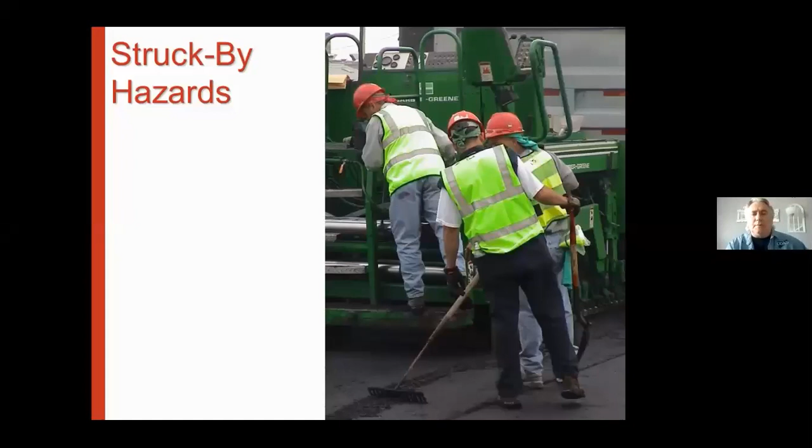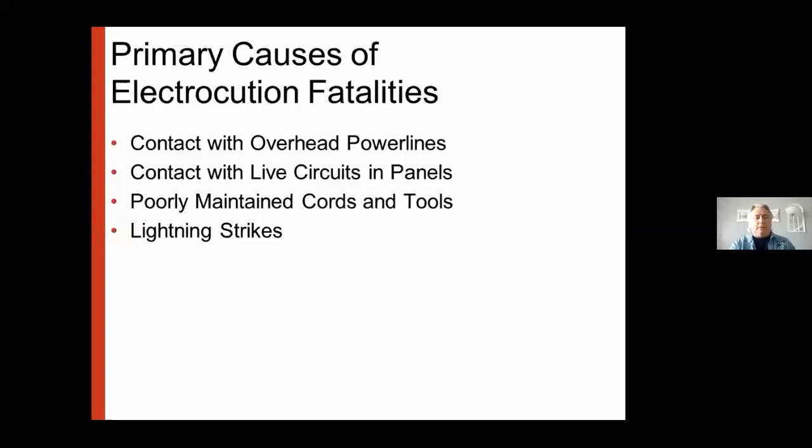Struck by falling objects, like I mentioned a minute ago - you're getting into rigging, things like that, things that we don't really run into much. Vehicle and equipment strikes - you've got backing incidents, workers on foot.

We have some of the garages or warehouses that you guys work in, they're dark at times. As a driver of one of the box trucks is pulling in, backing in, going in forward - we have this issue at COAD too, where you're going from a sunny, bright outside into a dark area. Even though there are overhead lights on, you really can't see what's going on.

Some of our trucks are equipped with a warning beep, beep, beep, but that becomes like living next to train tracks. Ryan Courier mentioned he's lived next to train tracks, and you don't really notice it anymore. Same concept, you just grow kind of immune to it. So you've got to stay on your toes.

All of these things we'll talk more about. Flying objects, you're getting into tools specifically. This happened when I was in high school in our shop, one of our grinding wheels broke. I was nowhere near it and nobody was hurt, but when that wheel came apart it was like an explosion and stuff went everywhere. There are flying objects, and horseplay isn't mentioned in there, but horseplay applies to flying objects too.

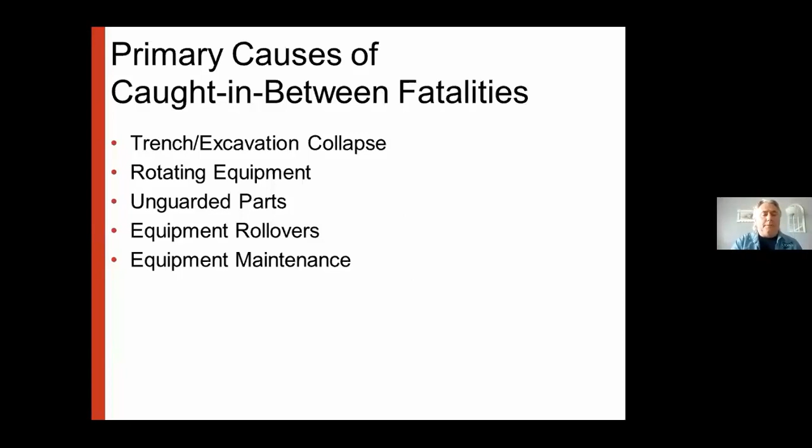Primary causes of caught-in-between fatalities: trenching, rotating equipment, unguarded parts, that's something we may run into occasionally. And then equipment rollovers and maintenance.

Fall-related fatalities: unprotected sides, edges, holes. You're getting into new construction with holes, or major renovation where they're using future stairwells to move equipment and materials. So those holes, when not being used, have to be guardrailed or covered for protection. But for us, on a roof, you've got unprotected sides and edges, residential roofing.

Improperly constructed walking or working surfaces. Our houses vary as far as what you're walking on. The stairs, some of the basement stairs are iffy at best. And the improper use of access equipment, failure to properly use PFASs, that's personal fall arrest systems.

And then slips and trips. Slips and trips are the most... I'm sorry folks, I'm being distracted, my dog is out here barking at other dogs. I'm sorry, it's one of the pitfalls of doing training like this. But slips and trips is the leading cause of injuries in the workplace.

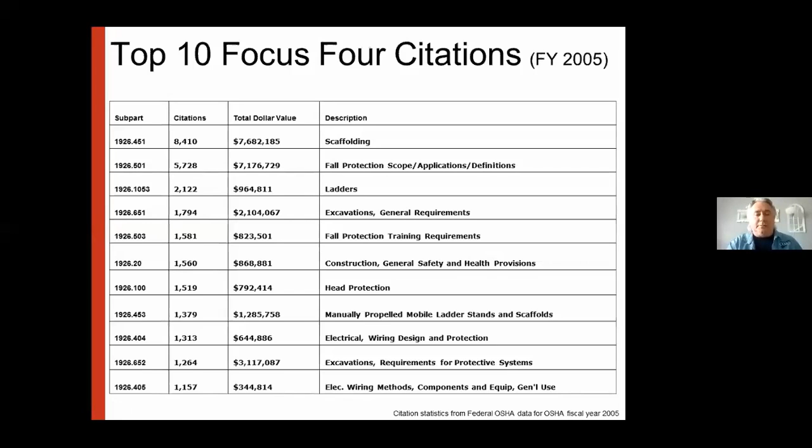Electrical citations, 1926, that's construction specifically. So wiring design, getting into this part of the stuff that I kind of gloss over during class.

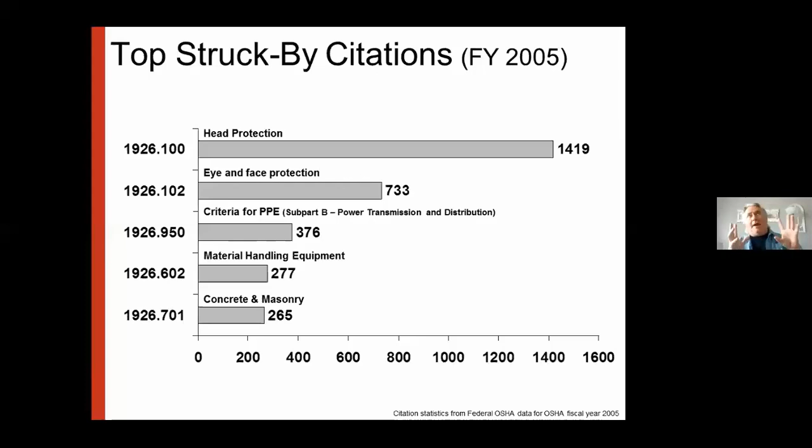Struck by: you've got head protection, overhead hazards, things that could fall, eye and face protection. That's relevant to us, even though few people take it seriously. But anytime you're using something that's throwing things, even if it's dust, or if you're laying in a way as you're working and you have dust or something falling into your face, you're supposed to protect your eyes and face, but eyes at a minimum.

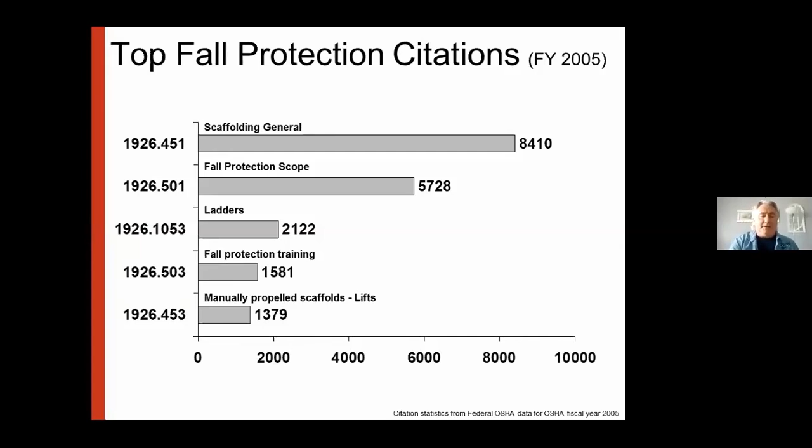Falls, again, as we saw in the one citation, statistics show scaffolding leads the way. Fall protection scope, and then there's the training again. So 85% of all citations and 90% of dollars applied as fines are related to these four, they call them the focus four. And 79% of all fatalities are related to the focus four hazards.

So again, NIOSH, this was part of their big push. It's been 17 years ago.

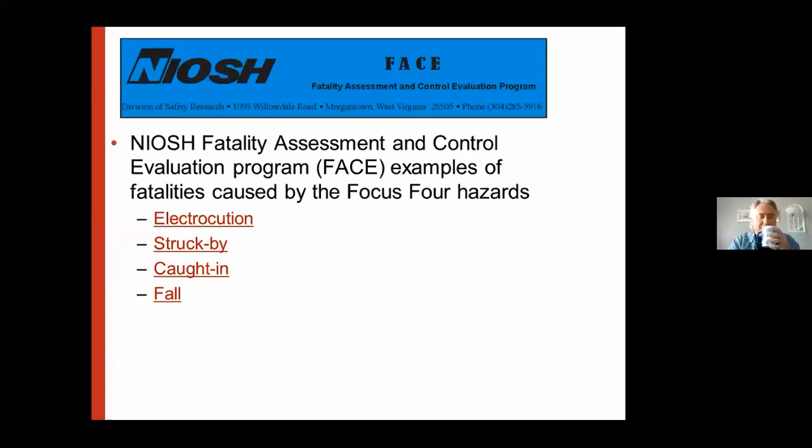So getting into electrical specifically, there are some pictures that some may find disturbing, so I apologize in advance, because you'll go from a picture like this to something kind of gnarly looking, so that's your official heads up. Part of electrical issues and training, and I've mentioned this a couple weeks ago, is lockout tagout. So duct tape on a breaker is not a legal form of lockout tagout.

Electricity will find the path of least resistance. It's like water, or a teenager, as I like to say. It'll get to where it wants to go, the easiest path.

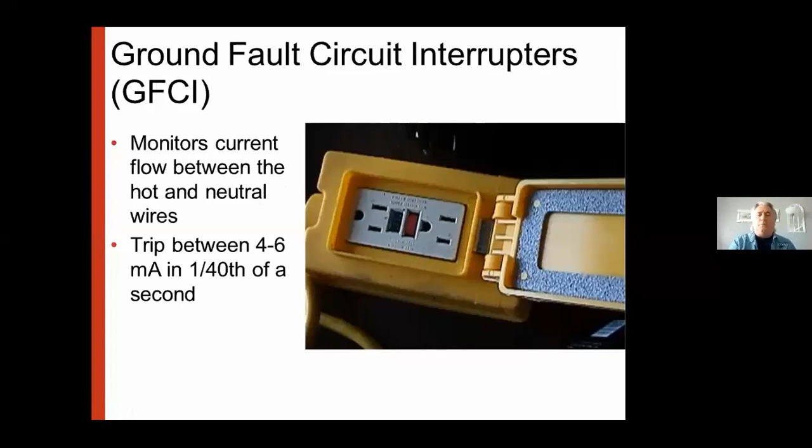And if that keeps happening, I tell people, don't blame this thing. Don't go over and kick it and throw it like it's doing something wrong. This thing is saving you possibly at least an injury, so it's doing what it's supposed to be doing. What you need to do is find out what's causing it to trip. It could be several things on the other end, but don't blame that thing there.

It's doing its job. That's for electrical engineers. This is something OSHA likes to see as part of their electrical safety program, and it doesn't matter what the trade is. They would like for a company's electrical equipment that's corded to be inspected along with the extension cords.

And what they like to see is color coding. It doesn't have to be exact, this is just a suggestion, as it says here, best practice every 3 months. So if you have some white tape or something, and you pick December, maybe before everybody goes away for the Christmas long weekend or a couple days, at least everybody's off at that time, somebody can inspect the cords and put the appropriate color. Then again in spring, summer, and fall - those are best practices, the things OSHA likes to see. It's just a way of keeping up.

We haven't gotten into fall protection yet, but there are some companies like AT&T that require ladder inspections. I don't even know if AT&T is still in business, maybe they sold out, I don't know. But when they were in business, if they're not now, they would have their crew guys out in the vans with ladders on top bring their ladders in quarterly just to have them looked at, to make sure, especially if they had dropped or fallen off the pole or whatever it is they were leaning it on.

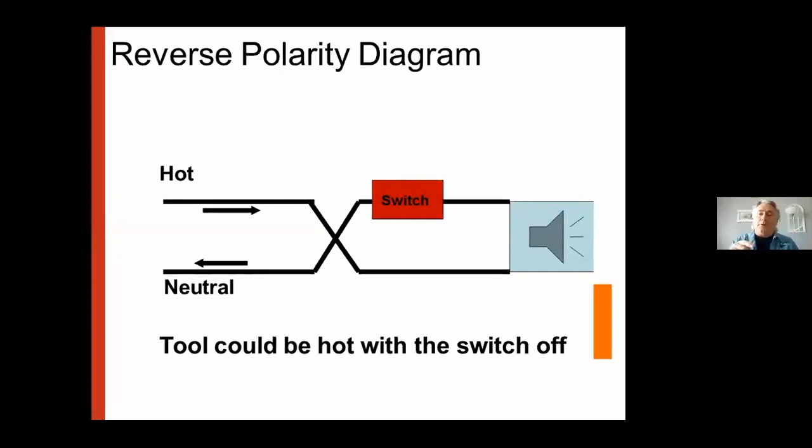Reverse polarity, just what I said, hot wire and neutral wires are reversed. Even though a switch is off, the circuit could still be hot.

Have it here, but they almost look like a fat ink pen because they have the little clip that you stick in your pocket. You turn it on. As we try to tell people, Jim in particular during his heat tech classes, this is not for troubleshooting. Just because there's power going through that wire doesn't mean it's the appropriate amount of power. That tick tracer is called a voltage detector. What it does is just tell you if there is power there.

Like this example here, this light, it would be nice before this guy started messing with the wiring, if he could have just put that tick tracer on there and it would have gone off. He would have known that just turning off the switch on the wall was not enough. It could be because of this reverse polarity, or there could be a three-way switch, and the switch on the other wall could be sending power through it. So those tick tracers are pretty good to have, especially for your initial inspectors and crew members who are crawling around.

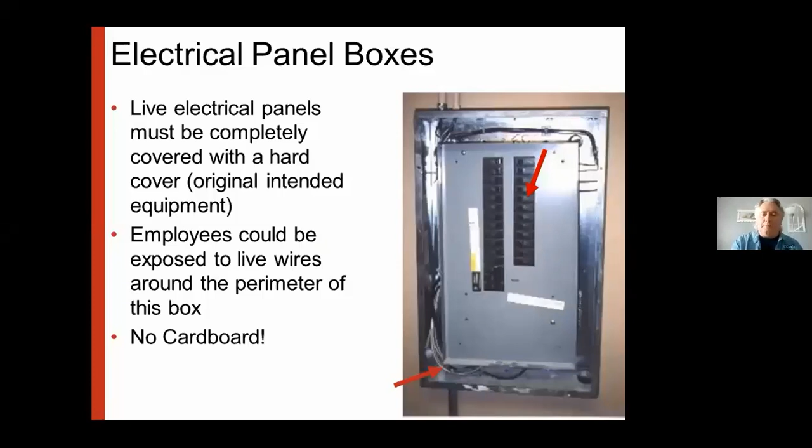Arc flash prevention. This is another one I usually fly through, but we'll look at it. A bank of meters here.

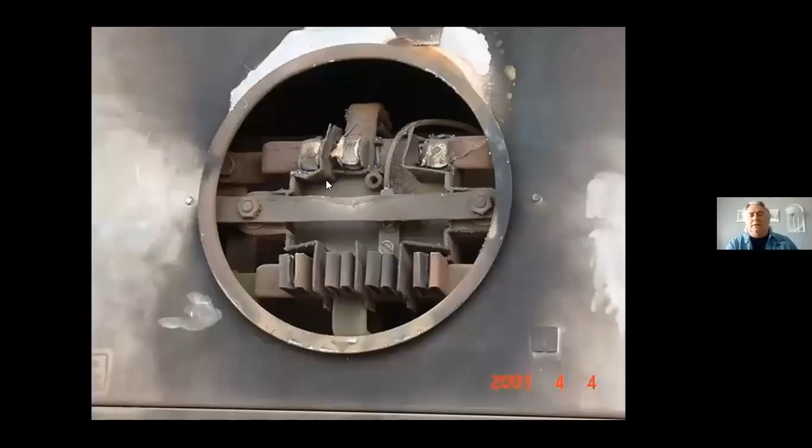So again, this bank of meters, there was an explosion, as you can see. It was mostly through here, but this is gone, completely gone. Here's a close-up. This stuff basically becomes shrapnel - that real thick, heavy, glass-like material, but it's like a plastic, real thick. That explodes. You have these metal lugs in here, and it's shrapnel leaving at a high rate of speed.

So this is the victim. If you notice his upper body, where the suit absorbed much of the energy, he's okay. The problem is from the neck up, which is unfortunately a problem for a lot of people.

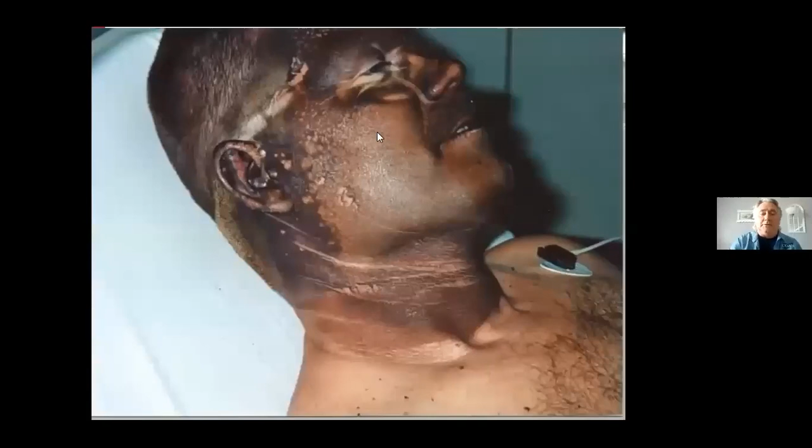Electrical arc, we're getting into things here. So the NFPA 70E, this is the electrical code. I'm trying to think of what else it's called, but it's part of the code.

So the boundaries, again, appropriate PPE, not just for arc flash related, but we need training and PPE for electrical safety. So what's the best way to work on energized electrical equipment?

You don't. You need to shut it down, lock it out. If it is a light switch or a breaker, best practice is that you're going to do a lockout, tag out.

We have that stuff at COAD, and maybe in a future presentation one of us will show you what those look like. But you can get a lock that goes on a light switch - the plate comes off, and the lock goes into the screws. Like with any lock, when the hasp part comes down, it covers the screws, and then the lock goes in.

There's similar ones for breakers and fuses, things like that. Because if you're in somebody's house and not really communicating with the homeowner, if you're getting into some electrical up in the attic and you've got light switches off in the basement or first floor, they may not know what it is you're doing up there. So they go over and click on that switch. It could light you up.

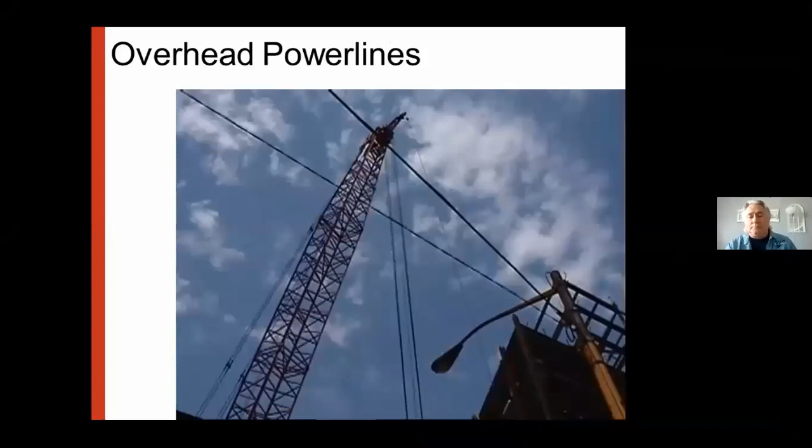Sometimes it's not the victim's fault, sometimes it is. In the little town I live in, northern Athens County, the town has their own electric and water, so they have their own workers, not AEP or whoever. A guy who was retired came back to fill in for somebody on vacation, and he was killed doing something similar, working in a bucket on overhead power.

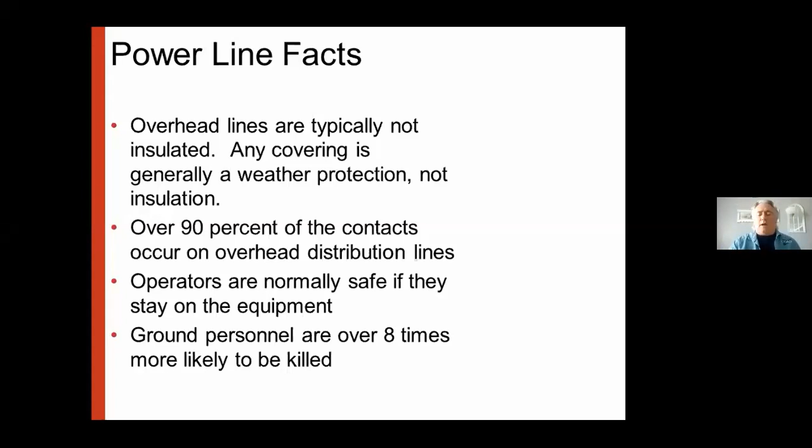He completed the ground, is what it comes down to. Electricity is very scientific, but it's very simple - it tries to find a path to ground. Lightning, and that's what we do.

So like equipment, as I was saying, the operators, if they stay on the vehicle - so if one of our box trucks, if the driver inadvertently goes through a backyard or something trying to get into a certain area, and they get into the overhead service drop coming from the pole, they should be okay sitting in the truck. It's the ground folks, their coworker outside, who needs to be warned. Don't try to touch the truck, because again, they will complete the ground.

So all equipment - ladder, scaffold, cranes, trucks, forklifts - must maintain a minimum of 10 feet. Now it does change, as it says here, you add 0.4 inches for every increase in voltage. But for us, primarily working on ladders around the mast, the service drop and the mast as such, a minimum of 10 feet.

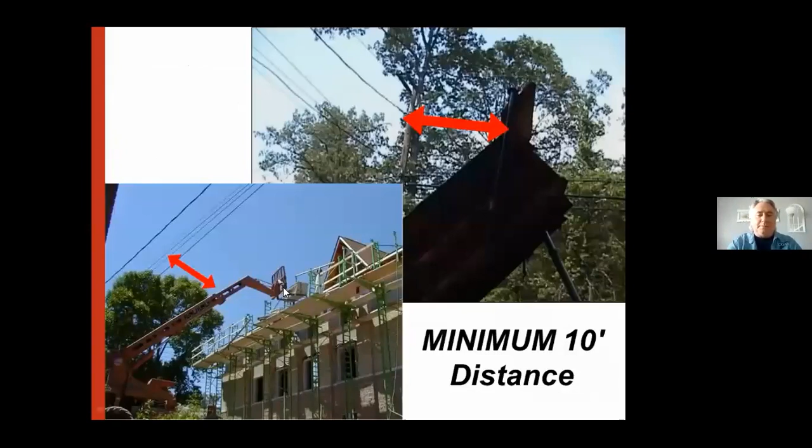How are you going to work in areas where you've got to get a ladder in there closer? It provides, if you will, a method to put materials up here so they're not using ladders. So, safe distance for people working with tree trimmers and so forth. Okay, yeah, here's an example.

Somebody got into it - as it goes farther out from the vehicle, it does dissipate. When I taught an OSHA 30 class for a few years at our local technical college for heavy equipment, the students told me when we got to this slide that was something they actually worked on in class: how to exit a vehicle if it got into electric, because sometimes it's not safe to be on the vehicle.

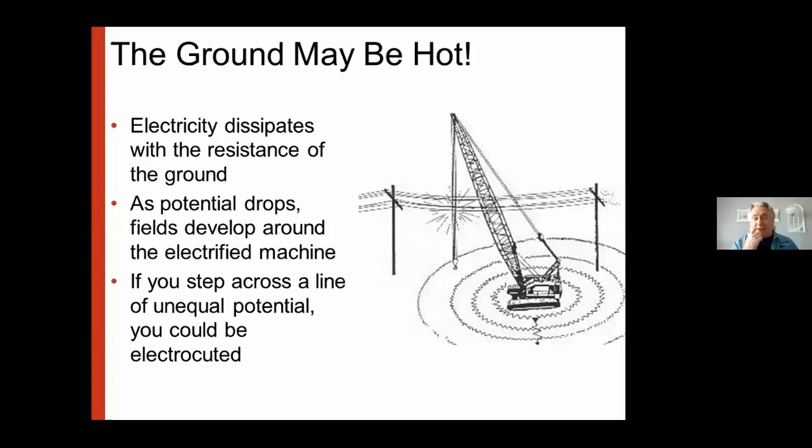But as you know, if contact occurs, stay on the machine if possible, warn others to stay away, notify the power company, and you can attempt to move away but assure the line is not connected. This was one of the exercises the students were telling me they would do over there - you jump from the machine. Again, don't step off the machine where you're touching it or in any way touching the ground.

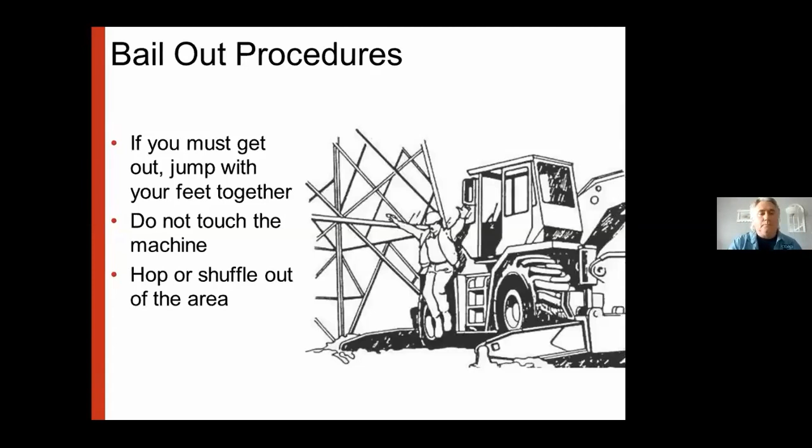So, how to stay incident-free: we plan, train, inspect, oversight, lessons learned, and then reevaluate. For us, as for most construction - a lot of the construction crews are there for months sometimes building things, so they get familiar with the area. For our crews, if they're hitting it, they're in a couple houses a week, if not more, especially the inspectors - the inspectors are in a couple a day.

So it's not as easy to plan every day, but there are some things that you can. I really stress for inspectors when you're pointing out hazards - in this case it's electrical - make sure that it's on that work order, whatever the hazard is.

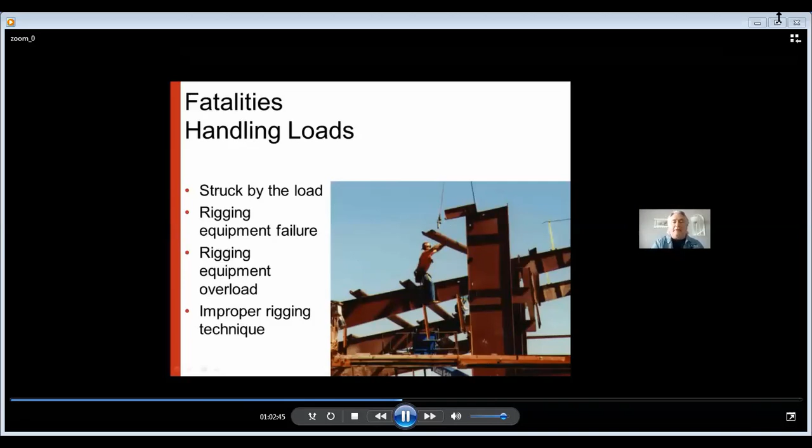And the sad irony, if this guy was to have gotten hurt - again, this is an OSHA photograph. Here is the lift that he was there to take him on up to where he needs to be. Or maybe that's as high as it'll go, whatever the cause or whatever it is.

So highway worker fatalities - we hear about these periodically. They've gotten a lot safer, literally, because of the contractors that work on the highways, due to the state DOT rules along with OSHA's.

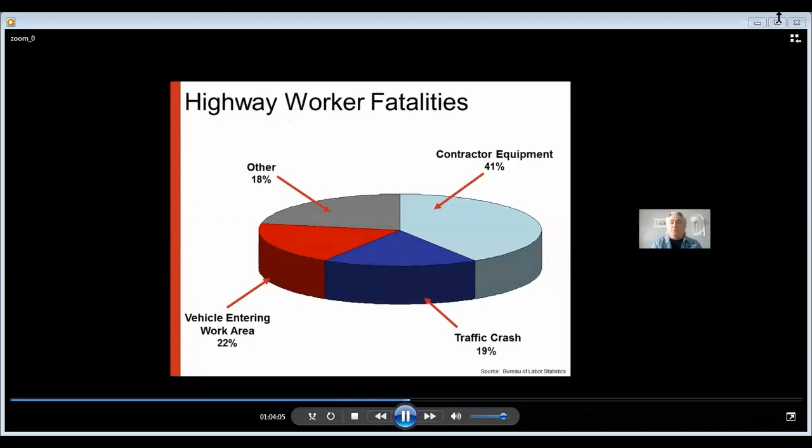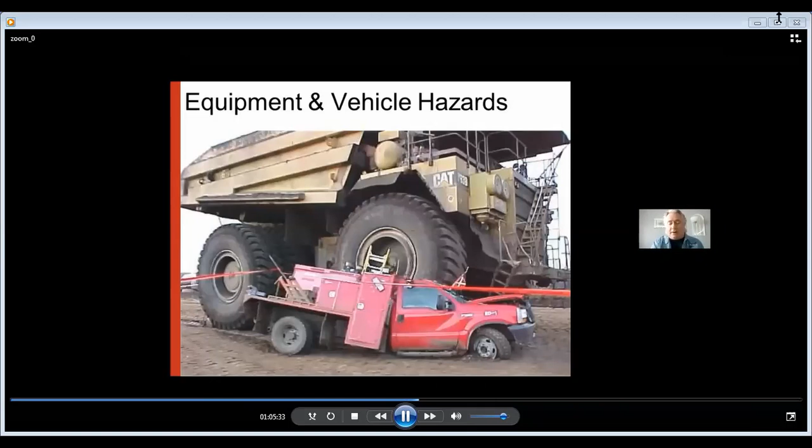Here's - who won? The cat truck won. This is, what in weatherization we're familiar with as a CAZ, combustion appliance zone, but OSHA calls this a CAZ also - this is a controlled access zone. So this red truck is not supposed to be in here. This truck here has very limited vision, as you can see. So on my notes, this PowerPoint provides notes and tells you what all happened. The driver was not in this truck either, fortunately. But he got out, left it sit there for whatever reason, and the other driver didn't see him, didn't see the truck. And that could have just easily been horrible.

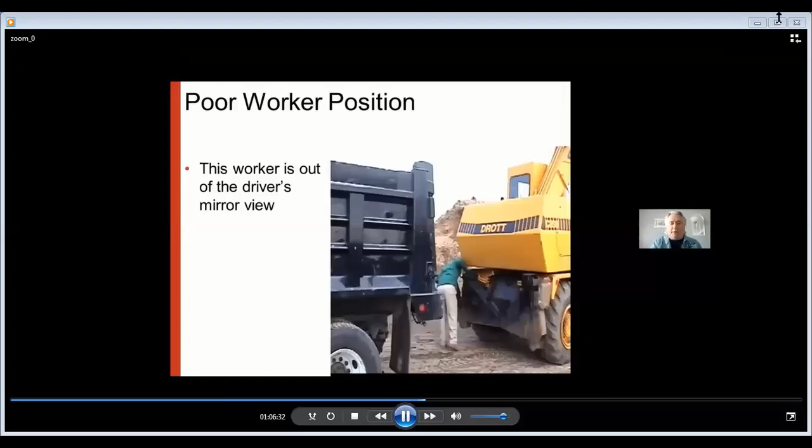Here's another case of that, like the electrical part I was telling you - somebody says, I've done this a million times, or they're in such a hurry they're not paying attention. The driver of the dump truck could have their foot on the clutch. It could just get pinched in the worst way. Same here, same concept - I've done this a million times. Now these trucks have a locking safety mechanism that goes to the bed up here and to the frame, and it's a shoring thing - it shores it up, and then there's a locking device so that if the hydraulics was to give, this guy here wouldn't get hurt.

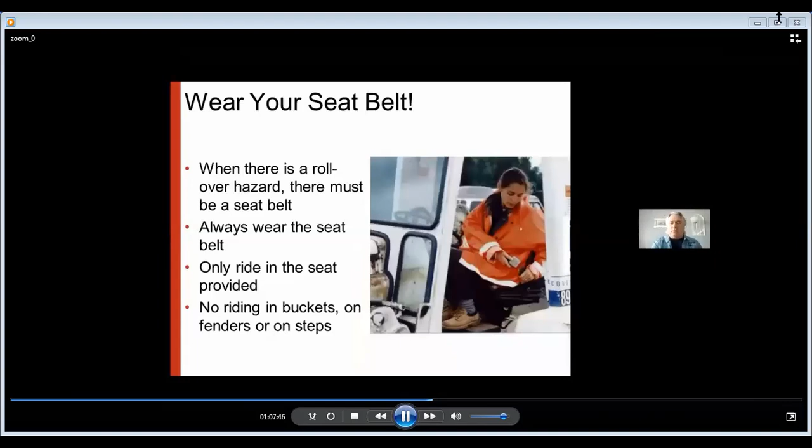Let's see - equipment rollovers and such, this stuff does vibrate while it's sitting there running. Wear your seatbelt. I remember during the days of ARRA, we'd pull in, like me and Jamie or whoever, into an agency to do a training, and these guys would be leaving in trucks that have bucket seats, and there were 3 guys in the truck. So it's like that drywall bucket or whatever it is they're sitting on is not DOT approved. So make sure that, like in that case, if it's a bench seat, that there are 3 seat belts available that are appropriate seat belts.

Backing equipment, I've already kind of mentioned this. If you're coming out of a bright, sunny day and you pull into a garage, even though it may be well lit, it's like being snow blind. It's spotty at best. So having a spotter in some of those areas helps. You don't need to be the smartest guy, you don't have to be the one who can split atoms, to know you stop and go. You need somebody controlling the area.

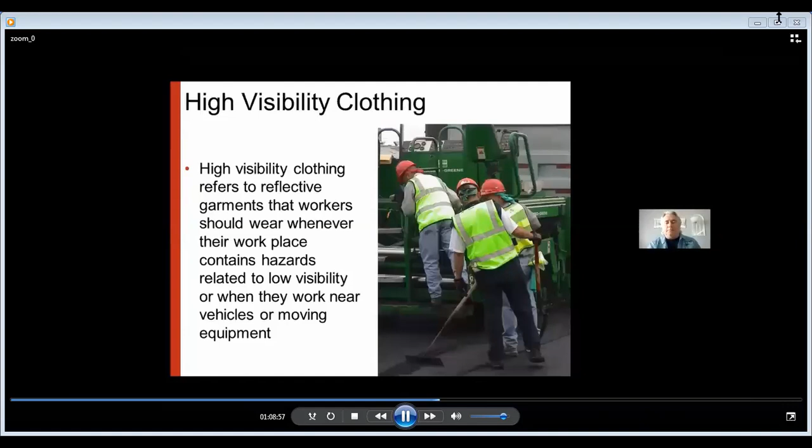High visibility clothing. Again, in certain areas, where I'm at it's a rural area. I would say the community action weatherization program would be seen as a rural program, but we have towns that they work into, so working on the streets, those things are nice.

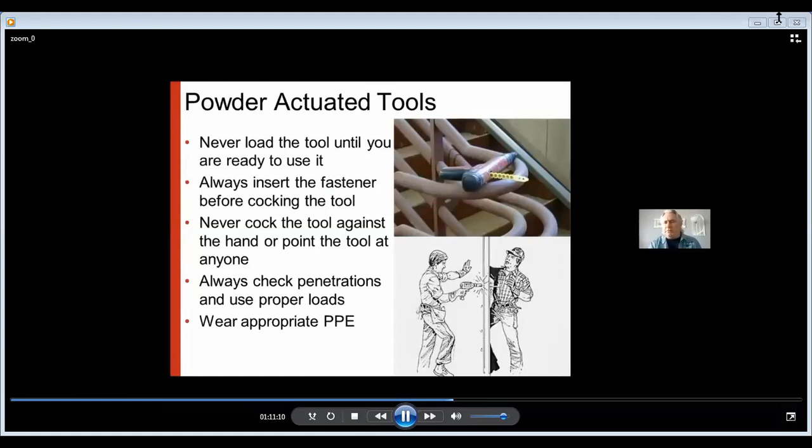Powder actuated tools, I doubt if we're using these, certainly for weatherization. OSHA looks at these things like they're loaded weapons or a loaded handgun, because they come in 22s and 38s and such. But again, I doubt very much we're using something like that for weatherization.

So how to be incident-free: planning, training, inspection, oversight, lessons learned, and then reevaluate.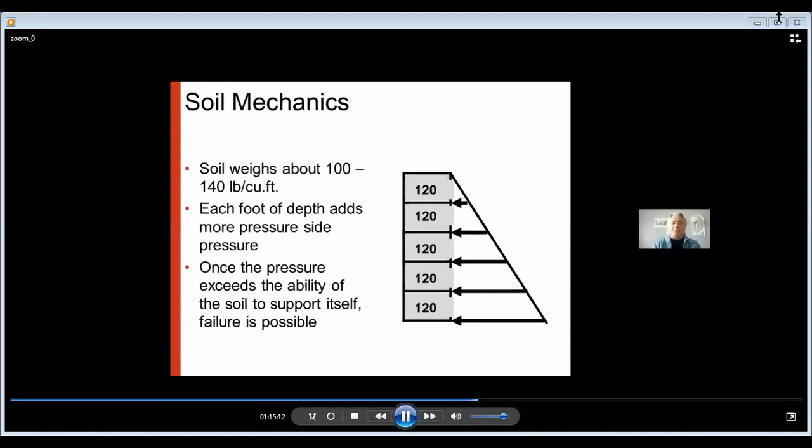Basics here - every hazard prevention has to have a competent person. And that's usually where the giggles start in class, because there's competent and then there's competent, I know. But what OSHA says a competent person is: somebody who recognizes a hazard. So let's go back a couple slides. They recognize a hazard, and they have to have the authority to stop work to correct the hazard.

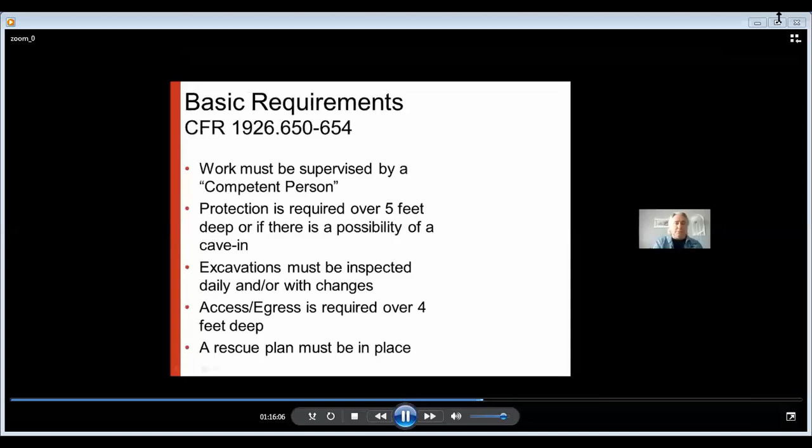Barricade excavations - again, this is all that's really needed. It's kind of like our lead stuff. All you got to do is have something up to indicate to anybody that this is not the place for you, you can't be in here. And again, this is called a CAZ, a controlled access zone.

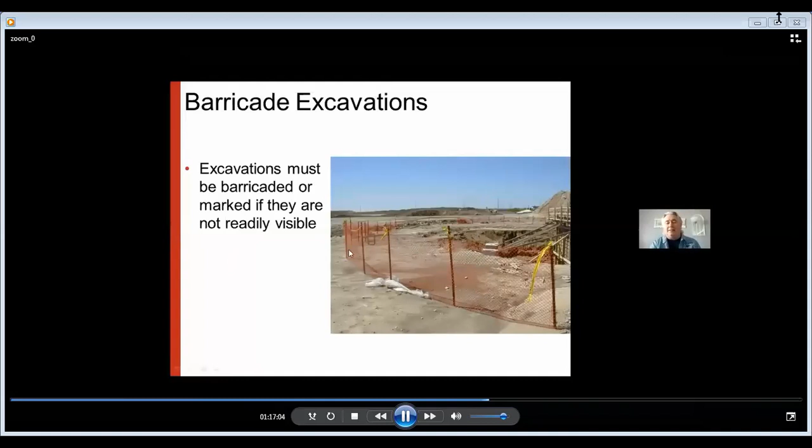Utility strikes - gas, water, electric. So a rescue plan...

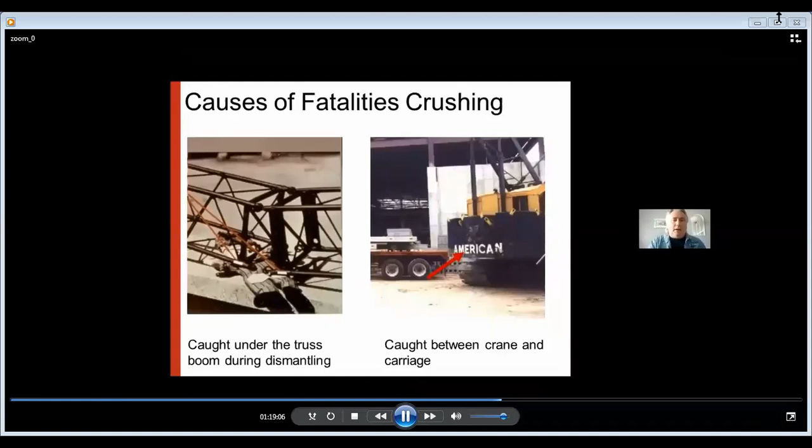Let's see - things collapsing, crushing, fatalities. Again, here's that tape area, that's the controlled access zone, keeping people out. Sorry about that - that's one of the shock and awe pictures. That's if something gets a hold of you, you're caught.

Rings, shirts, long sleeve shirts. Some tasks require you to keep your sleeves rolled down and buttoned with gloves. Other tasks require you to roll up long sleeves so they don't get caught in moving equipment.

As with electric, which is what we're probably most accustomed to when it comes to lockout, tag out, any piece of equipment that runs on energy, it could be gravity, hydraulics, whatever. If it's being worked on, if the worker is getting in there somewhere, then it has to be locked out and then tagged, just like the electrical. There's a lock, and then there's the name of the person who has the lock.

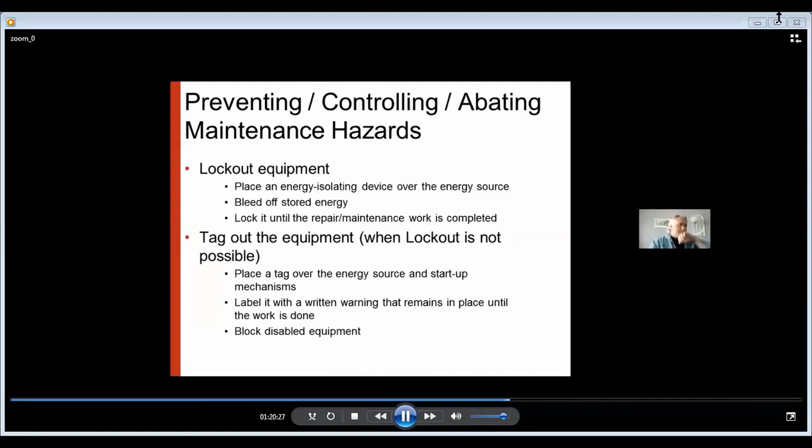About 10 or plus years ago, some guy invented this thing. It's a sensor that goes through here, and it will pick up contact, and they demonstrate it with a hot dog. If you go to YouTube you'll see that thing. It will stop this blade so fast, kind of like a GFCI with electricity, that it'll actually destroy the blade. But it happens so fast you can't see it.

The guy who invented it was so cocky and confident that he was willing to use his own hand. But as you may imagine, at a lot of places, the home and garden shows, the trade shows, they wouldn't let him do that. So he was using a hot dog instead. That thing, I encourage you to look it up, just because it's a neat thing to see. It was, or used to be, I don't know if he's made improvements, a one-incident piece of equipment.

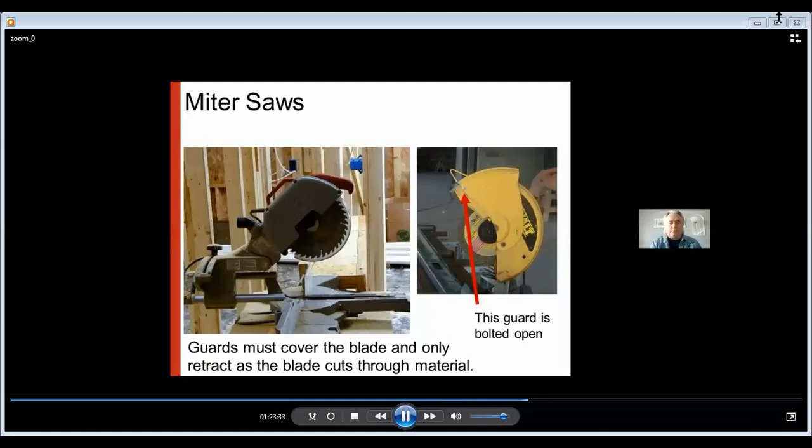Let's see, dumping trucks, not really. So this is probably starting to look familiar. How do you remain incident free?

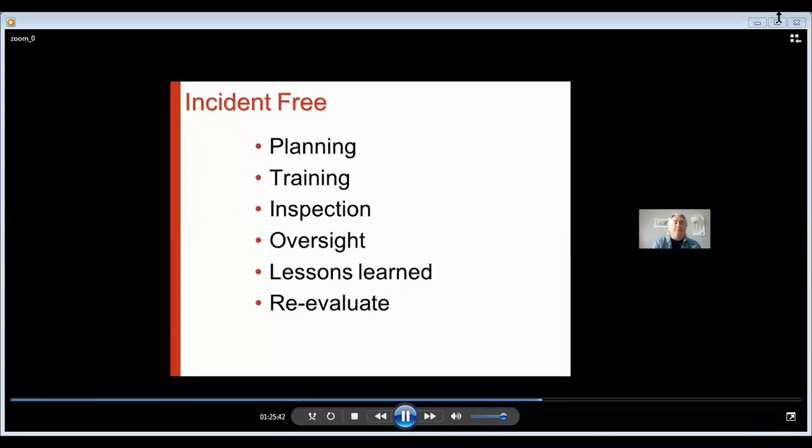So there's inspections, oversight, lessons learned, and again, reevaluation.

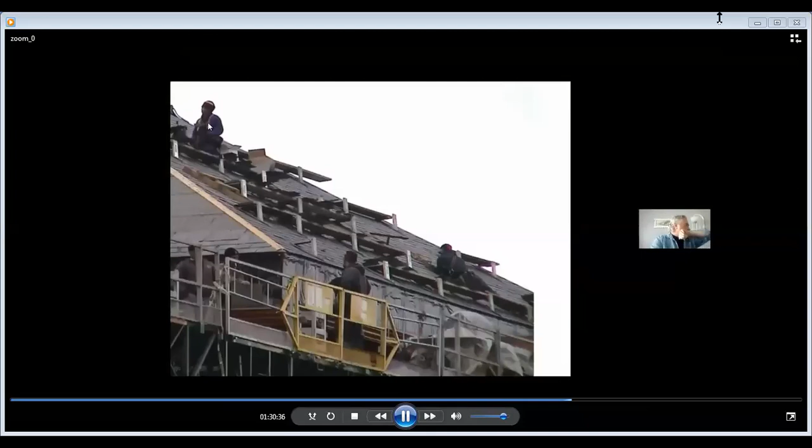The guys down here, they're behind this gate here that opens so they can get material on and off. They're behind this fall protection here, the guardrail system, so they don't have to have the harnesses on. These guys do. Now, up until 2010 I think, residential roofers had a variance they could use, called slide guards - they could use 2x4s they could nail into, like on an asphalt roof.

They could attach to the roof and didn't have to wear harnesses, for example. That was considered fall protection. The problem is as they're tearing off the old roof or throwing scraps, that stuff would land on that 2x4, which only sticks up 1.5 inches. So in some cases what they were constructing was essentially a ramp. Somebody would lose their balance, start to slide, and that thing offered zero protection. They would slide right over top of it.

This fall protection is designed in a way with these harnesses that if he ever fell, he's not going to fall all the way down and off the side. This thing is designed so you can't go any farther than 6 feet, but you really want it designed so that if he slips and falls, he's only going to slide a couple of feet.

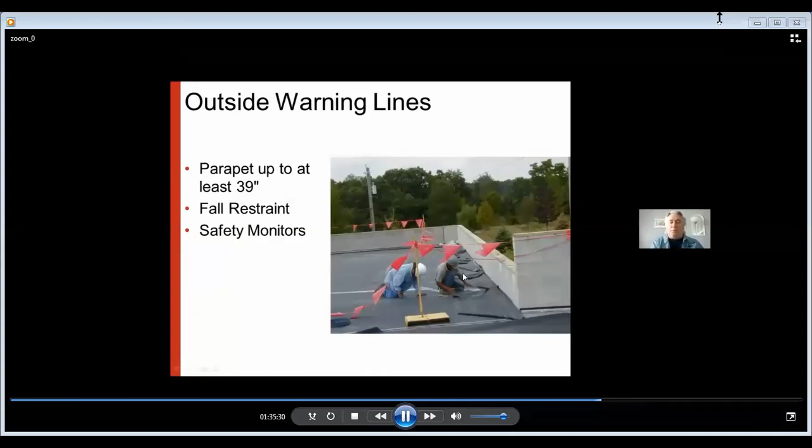I've never quite understood this. We make fun of it in class, the guy defying gravity or something. Here's an example of a safety monitor on the roof trying to yell at this guy, because he is literally a half a step backwards from having a bad day. There's just no... and again, he's focused. He's thinking about what he's going to do tonight. Get this over with, I got to do this, do this, do this. And he's worked at this job now for a couple of months, maybe. So there's a certain comfort level as well, I guess.

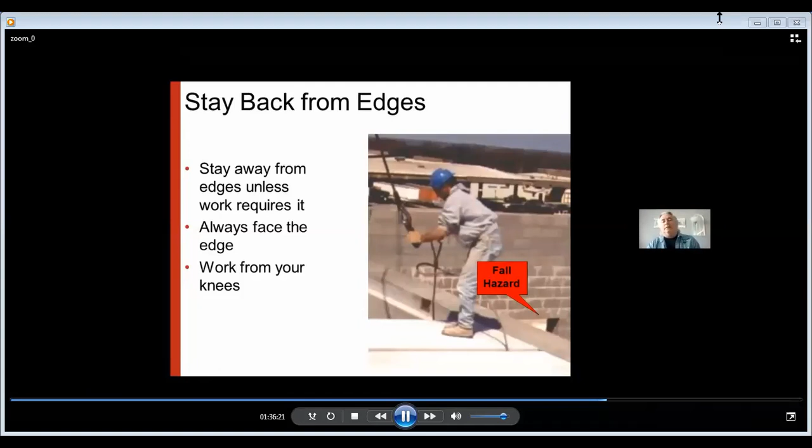OSHA compares them to the safety device in your car, your seatbelt. So they can walk freely and this thing will give slack. But the minute they run or fall or do something, it'll catch. Now how's it stop the fall? This is set up so that these things will only go maybe 10 feet. So if the leading edge is 11 feet away, that's going to prevent the fall because it'll only go so far.

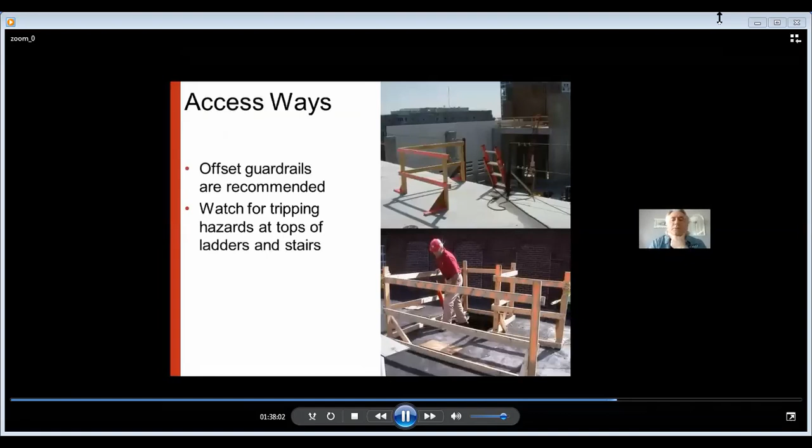Stairways, we won't talk much about them. I know some of the basements you guys go up and down those stairs - those stairs are not the greatest in some cases. So use your best judgment and be safe.

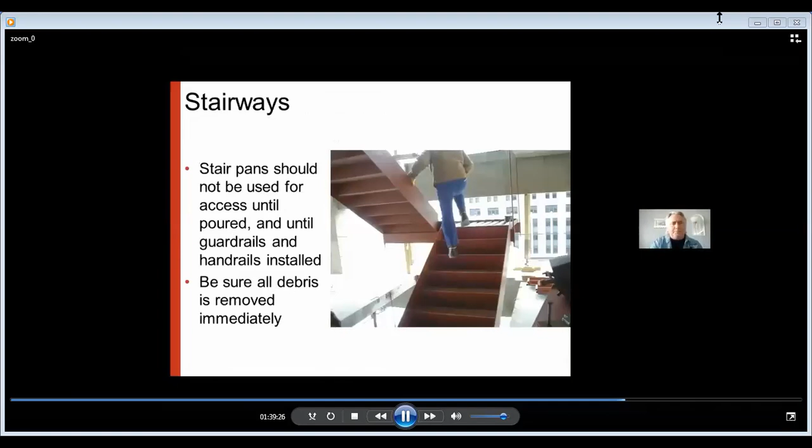Scaffolds and ladders, we're not going to talk much about that. When we did training with mobile homes in the field, we always took out scaffolding. It made it nice for the training because we could get several people up onto the scaffolding to take turns as we were lifting the roof and then sticking the 2x6 or 2x8 in there and blowing in insulation. If you ever get a chance to work on a scaffold, you probably won't like going back to a ladder much, but I know scaffolding doesn't always have a place at our homes. The mobile home parks, most of them, even in our area where it's hilly, seem to be in flat areas, so it was good to be able to use scaffolding.

Scaffolding - there are a couple of urban legends, if you will, on scaffolding. It does not take forever to set up; two people can do it in minutes. You can move them too - two people can pick up the scaffolding for what we do and move it down the house without disassembling it. The one thing that is true: they do take up valuable space on the trucks, so that's a major headache when we lose space.

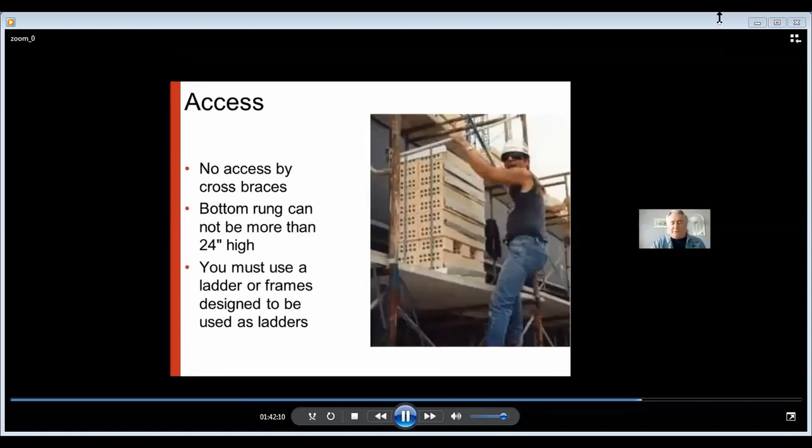Let's see, accesses - again, I'm not going to talk much about these. This is the middle scaffold, this is the kind that we have at COAD, and you can work 10 feet off the ground on scaffolding before you have to put up the guardrails. This is a Baker type scaffold - these come with wheels.

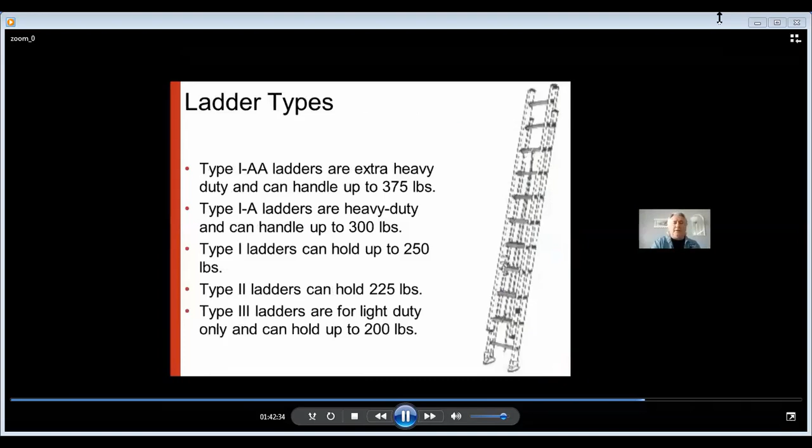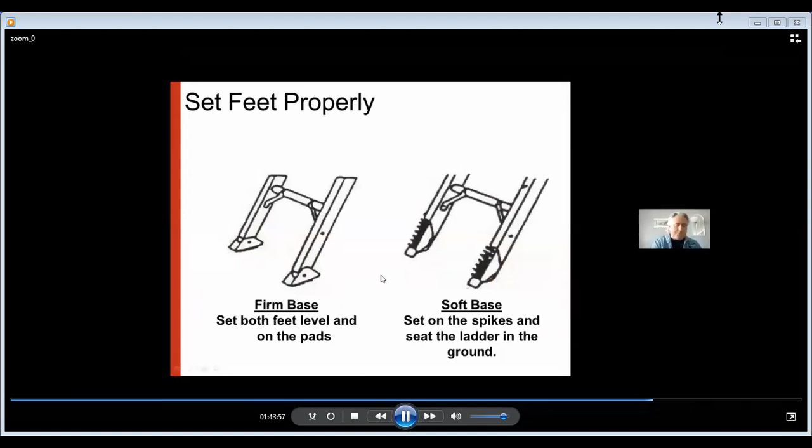Let's see, bridges—no, we're not talking about bridges. So let's see.

Well, there it is, all right. I have a video here, let me pause it. Or actually, I'm already paused, sorry about that. Here.

And as you can see there, it's on ladder safety. So we'll finish up the day because of my allergies. Every day throughout the U.S., ladders are used. Unfortunately, many workers do not know how to safely use this tool. Being aware of the hazards of ladders can easily prevent an injury to you or a coworker.

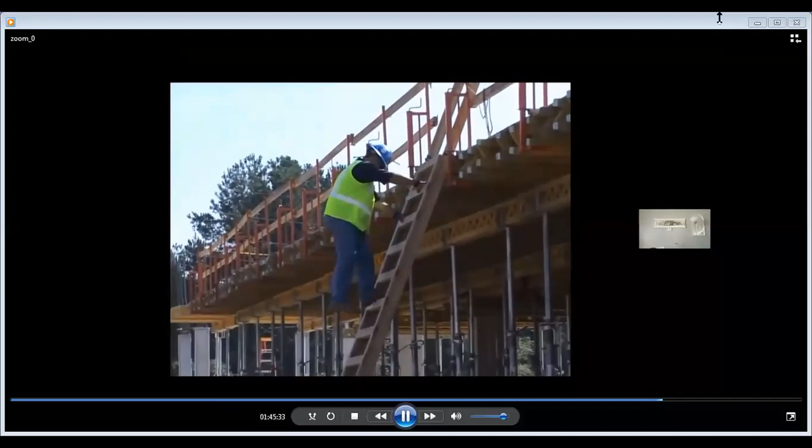As you already know, ladders are used in a variety of different situations. Misuse of ladders or other careless actions can result in serious injuries from falls or electrical shock. Falls from a ladder can result in broken bones, electrocution, and even death.

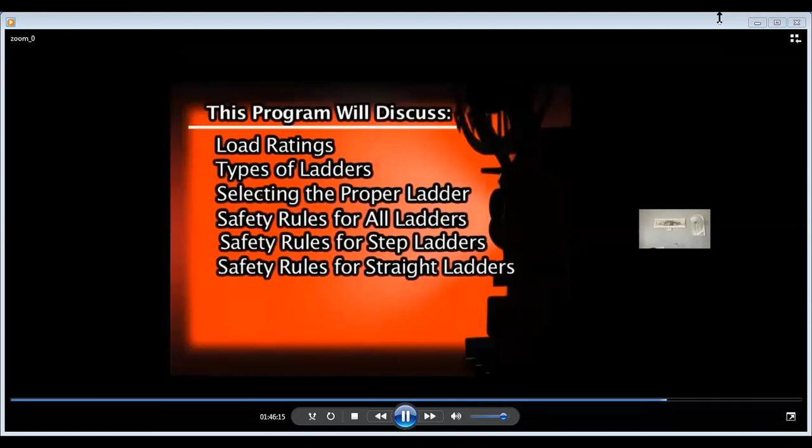This video program is designed to provide information on the proper selection, use, and maintenance of ladders, resulting in safe work practices. This training program will discuss load ratings, types of ladders, selecting the proper ladder, safety rules for all ladders, safety rules for step ladders, safety rules for straight ladders, defective ladders, proper ladder storage, and training.

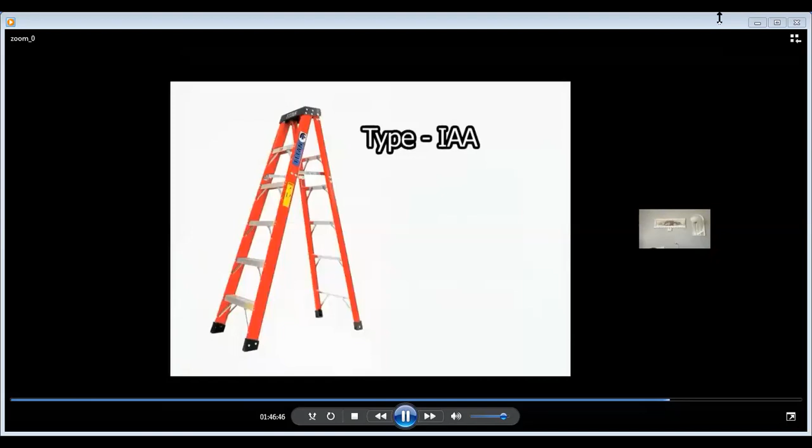Ladders are rated using a system of numbers and letters. Each designation refers to a load capacity of the ladder. Type 1AA ladder refers to a commercial grade heavy-duty use ladder. It has a weight capacity of 375 pounds and is available as a step ladder only.

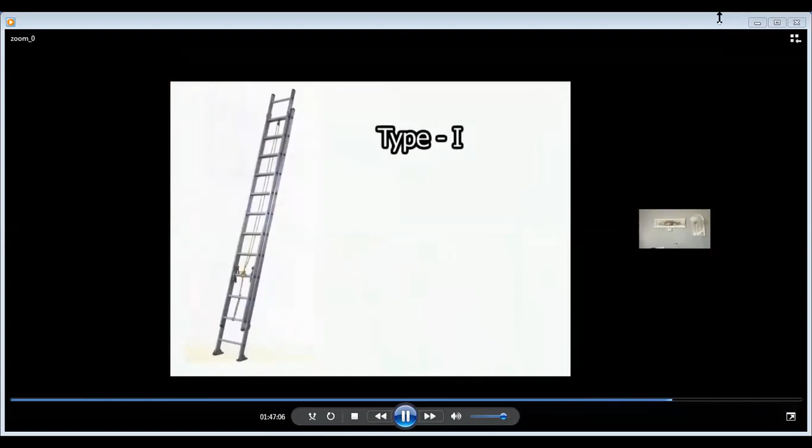Type 1A ladder refers to an industrial grade heavy-duty use ladder, with a weight capacity of 300 pounds. Type 1 ladder refers to an industrial grade general use ladder, with a weight capacity of 250 pounds.

Type 2 ladder refers to a commercial grade light use ladder, with a weight capacity of 225 pounds. Type 3 ladder is household light duty use, with a weight capacity of 200 pounds. Type 3 ladders should not be used in construction or general industry settings.

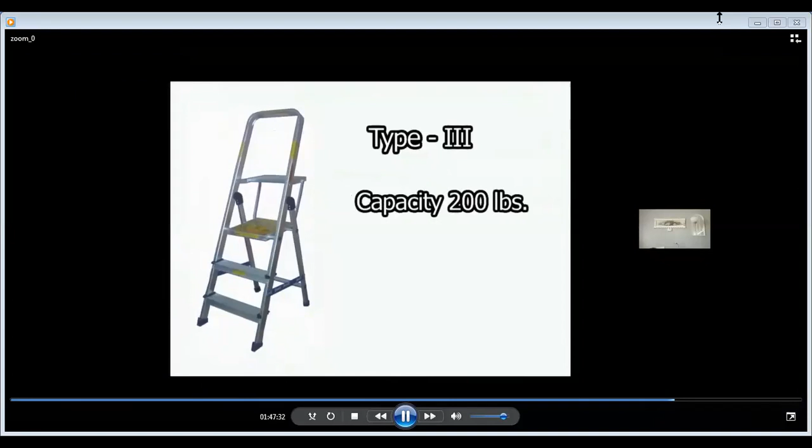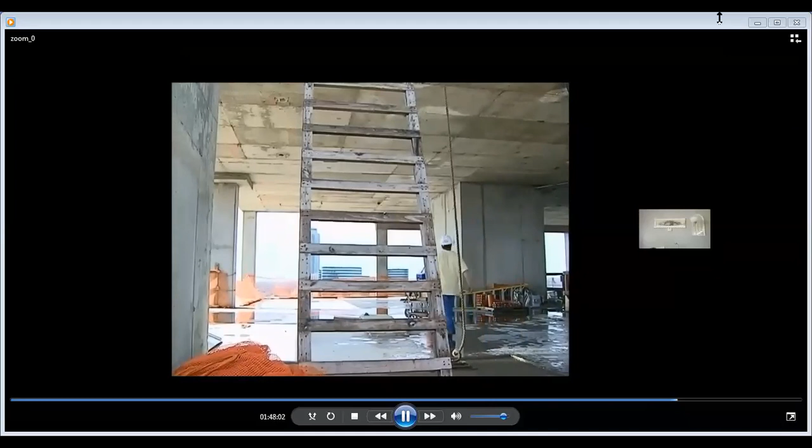There are many types of ladders and devices used for working at various heights. Some of the different items used are portable ladders, fixed ladders, step stools, combination ladders, shelf ladders, and site-built ladders, which are usually temporary. While many of the safety rules and guidelines discussed would apply to these different types...

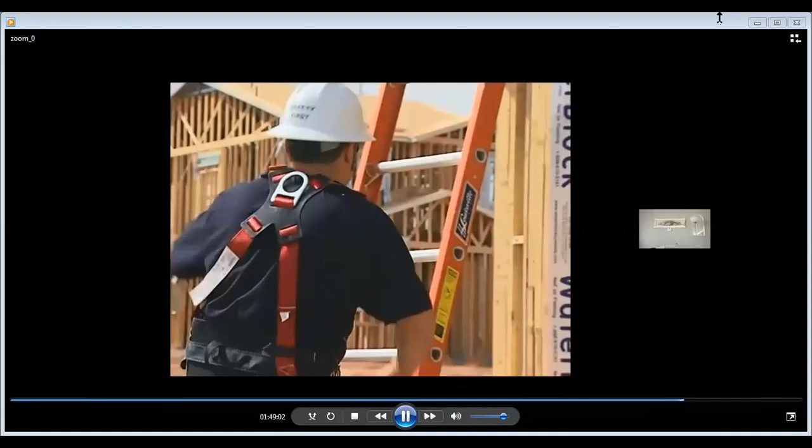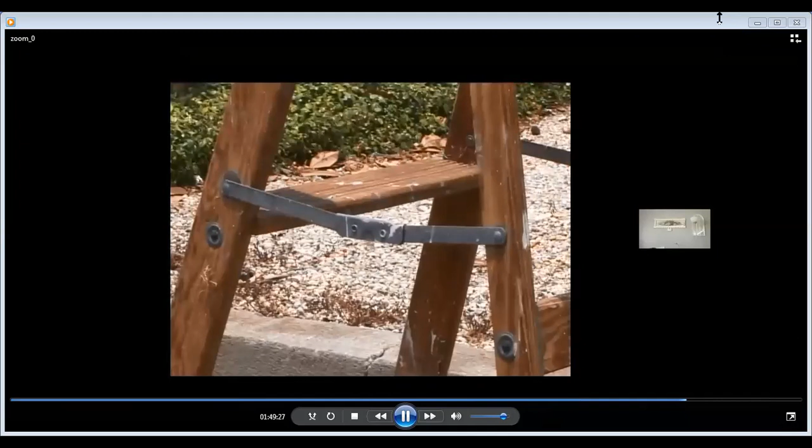To meet OSHA loading and strength requirements, all ladders should meet or exceed American National Standards Institute, ANSI, standards. All Type 1, 1A, and 1AA wood, aluminum, and fiberglass ladders meet or exceed ANSI standards and therefore meet OSHA standards for ladders used in the workplace. Other types may not meet OSHA's standards and should not be used in construction or general industry settings.

Always consult your company's rules and guidelines. If you do not understand or have questions, ask your supervisor. Consult manufacturer's guidelines on the possible and appropriate uses of the ladder. Guidelines are often printed on the side rails of the ladder.

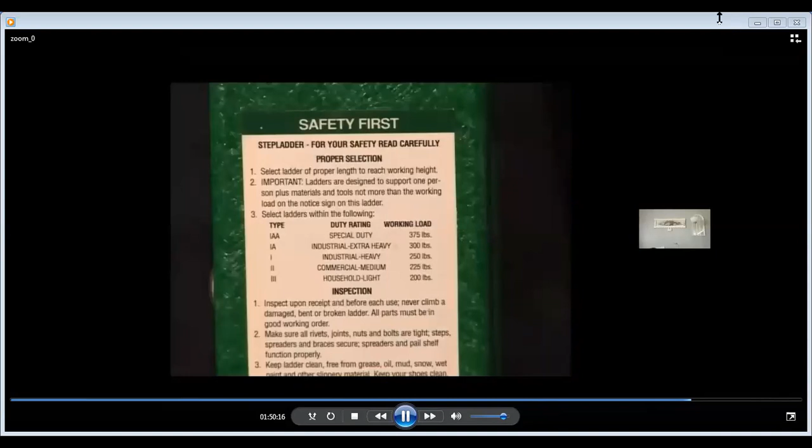Before using any ladder, make sure it is of sufficient strength to complete your task. Never use a metal ladder on or around live electrical components. Always use a wood or fiberglass ladder when working around electricity. Check the warning label to ensure the ladder is suitable to work around electricity. Never use a ladder that is wet around electricity.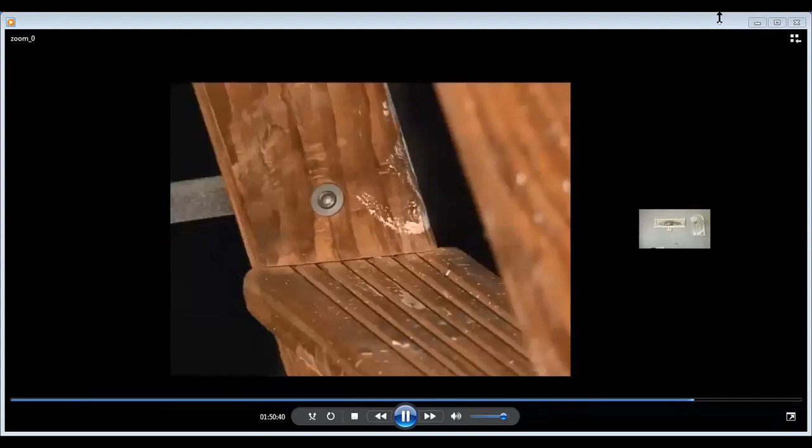Before using a ladder, inspect it for damage, loose components, and general condition. Look for loose rungs, nails, bolts, and screws, cracked, broken, or split, badly gouged or worn rails, rungs, or cleats. The pre-job inspection is important and should become part of your routine.

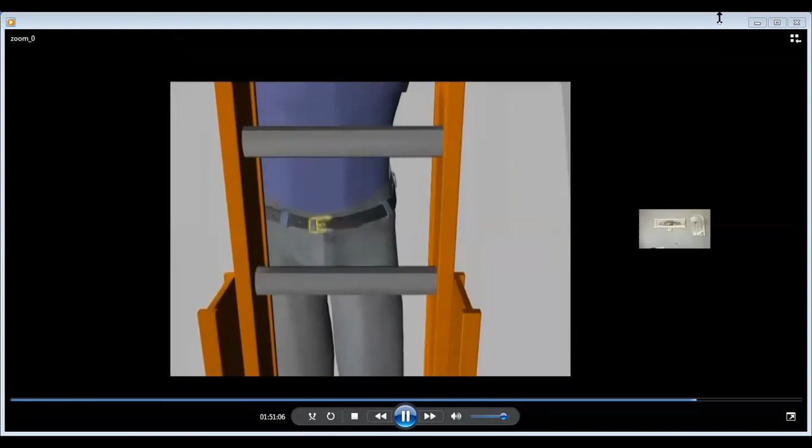When on a ladder, always maintain 3-point contact. One hand and two feet, or two hands and one foot, should always be firmly in contact with the ladder. Always keep your belt buckle between the ladder side rails. This keeps your center of gravity in a safe zone.

Always wear non-skid shoes when climbing a ladder. Keep your shoes clean. Keep ladders free of oil, grease, and other slipping hazards. Clean the rungs prior to climbing a ladder.

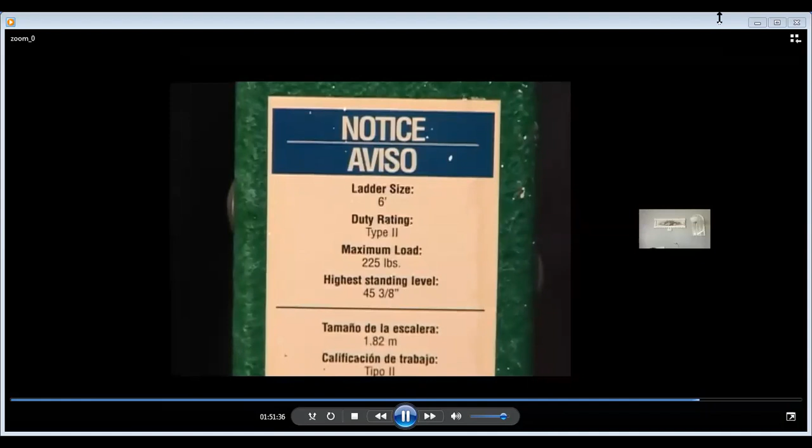Use ladders as they were intended to be used. Never use a step ladder in place of an extension ladder. Never load a ladder beyond the maximum intended load or the manufacturer's rated capacity. Always use ladders on stable and level surfaces.

Never try and increase a ladder's height by placing the ladder on boxes or pails, etc. Never use ladders on slippery surfaces unless secured to prevent accidental movement. Always secure ladders when used in areas such as doorways, passageways, driveways, or other areas where they could be displaced.

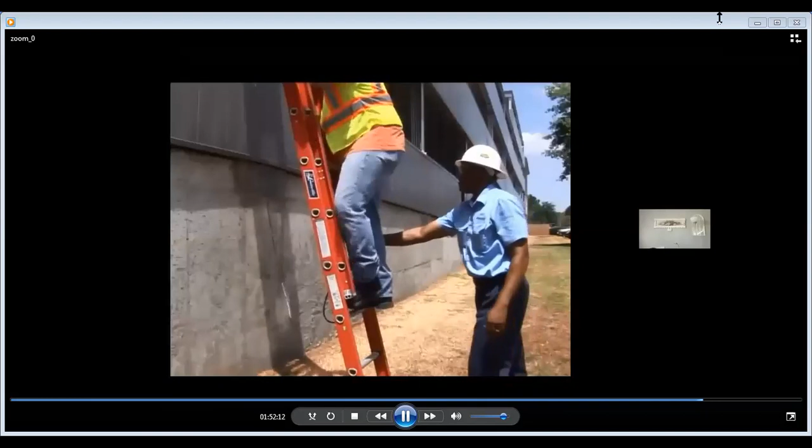Barricade the area to keep traffic or activity away from the ladder. Only have one person on the ladder at a time. Have a second person hold the ladder while the other climbs. This will prevent the ladder from swaying out from underneath the climber.

Do not move, shift, or extend ladders while in use. Use extreme caution when working around energized electrical equipment. Make sure the ladder has non-conductive side rails.

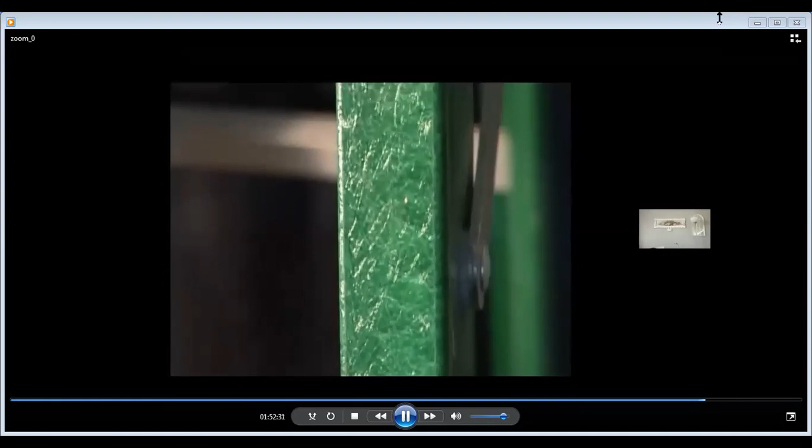Always face the ladder when moving up or down. Use both hands when going up or down the ladder. Do not carry objects or loads that could cause you to lose your balance and fall. Hoist objects after you have reached your destination height.

Don't climb a ladder if the weather is not conducive to climbing, high winds, rain, or snow.

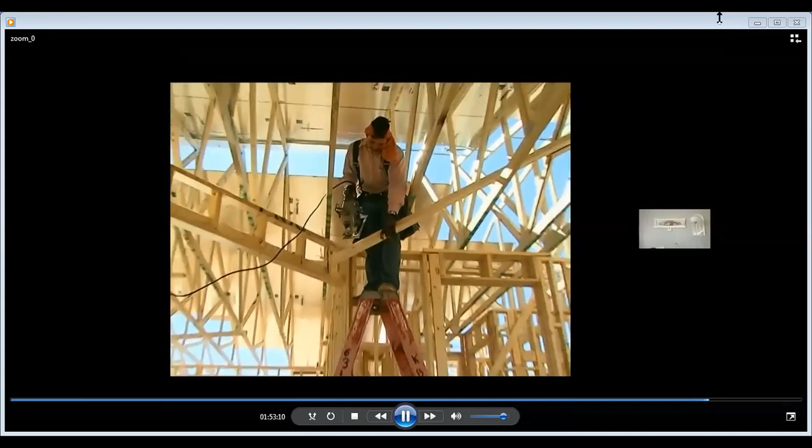Never use the top or top step as a step or seat. Do not use cross bracing on the backside of a ladder for climbing or any other purpose. A paint shelf should only be used for paint trays or cans.

A stepladder needs to be braced in place by a metal spreader or locking devices. Never climb on a stepladder if it is not braced and locked. Never use a stepladder as a straight ladder.

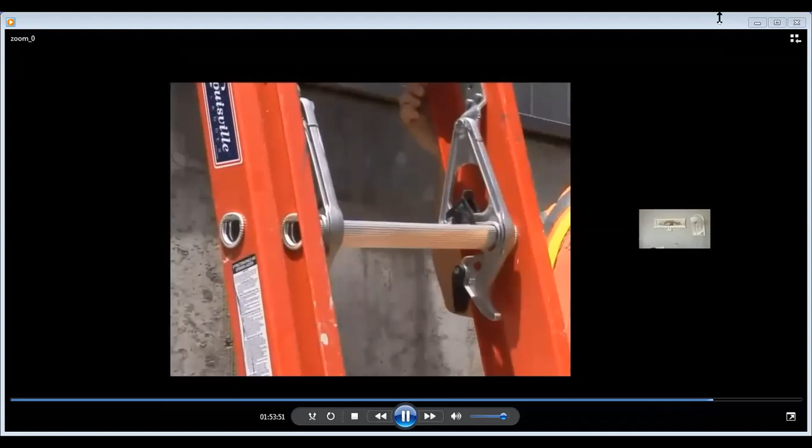After raising a ladder to the desired height, lock the side in place. Side rails must extend at least 3 feet above the upper landing surface. Tie off the ladder to prevent movement.

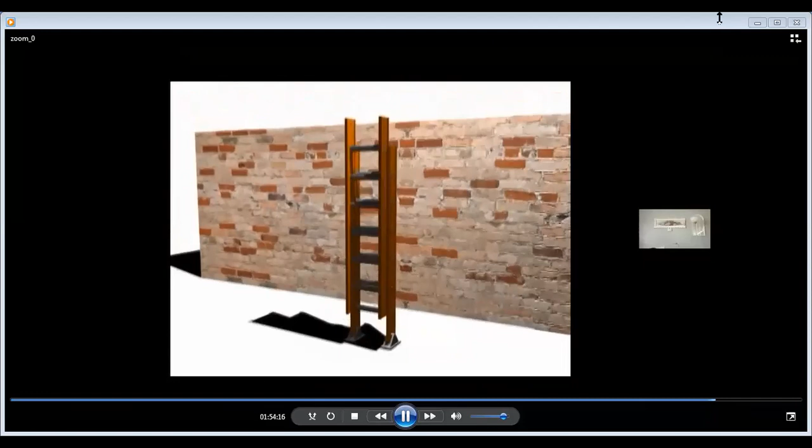For every 4 feet in height from the ground to where the ladder is touching the support at the top, the bottom of the ladder should be 1 foot away from the wall. This is known as the 4-to-1 rule. As an example, if the ladder is resting against a 16-foot wall, the base of the ladder should be 4 feet out from the wall.

Never stand on the top 3 rungs of the ladder. Never place the ladder against a movable object.

Portable ladders with structural defects must immediately be marked defective or tagged with 'do not use' or similar language and taken out of use until repaired.

Defects that would render a ladder not to be used would be broken or missing rungs, cleats or steps, broken or split rails, corroded components, or other faulty or defective components.

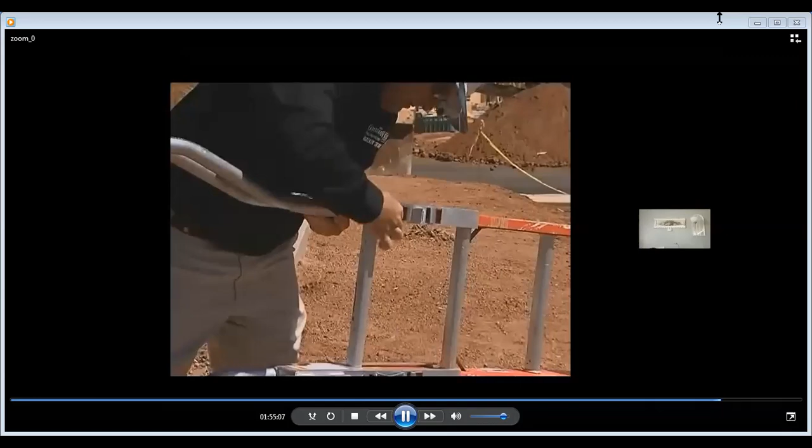All ladder repairs must restore the ladder to a condition meeting its original design criteria before the ladder can be returned to use. Repair work should only be done by qualified persons or the original manufacturer.

Any ladder that cannot be repaired must be destroyed and discarded. Generally, it is best to destroy and discard any defective ladders and replace them.

Storing a ladder correctly is important in maintaining the ladder's integrity and usability. Whenever possible, store ladders vertically. If they must be stored horizontally, support the ladder in several places to avoid the rails from sagging.

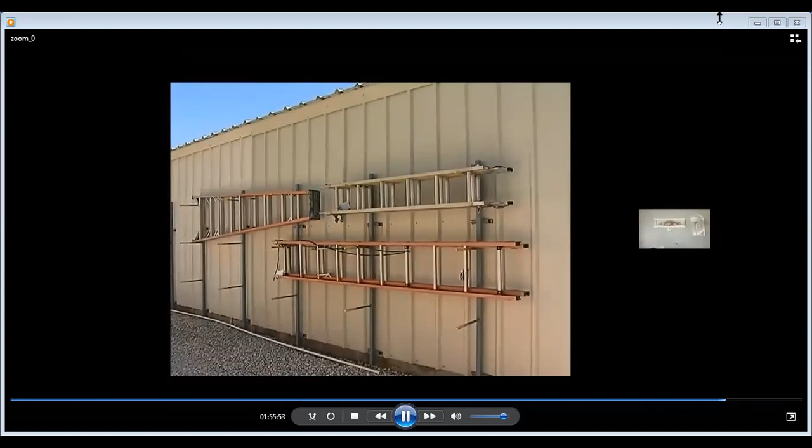Ladders stored on the ground could become a tripping hazard. Never store them where they create a hazard. Whenever possible, store ladders out of the weather. Always store ladders away from heat or any other hazardous conditions that could compromise the integrity of the ladder.

Employees must be trained to recognize hazards related to ladders and instructed on how to minimize those hazards. Employees must be trained by a competent person.

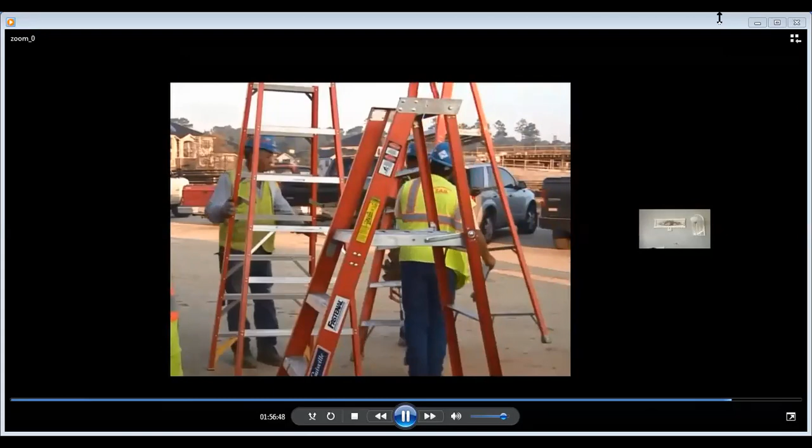The training is to include the nature of fall hazards and the correct procedures for erecting, maintaining, and disassembling the fall protection systems to be used, proper use, placement, and care in handling of all ladders, and the maximum intended load carrying capacities of ladders used.

Retraining is required for each employee as necessary so that the employee maintains the understanding and knowledge acquired concerning ladder safety.

Remember that a fall from a ladder can easily cause a broken bone, back injury, or death. Always choose the correct ladder for the job.

Ask yourself, how much weight will it need to hold? Will it be near electrical lines? How tall does it need to be?

Inspect the ladder before each use. Look for loose rungs or cleats, loose nails, bolts and screws, cracked, broken or split, badly gouged or worn rails, rungs, or cleats. Always use the three-point rule with your body between the side rails when climbing any ladder.

And finally, always face the ladder when climbing up or down.